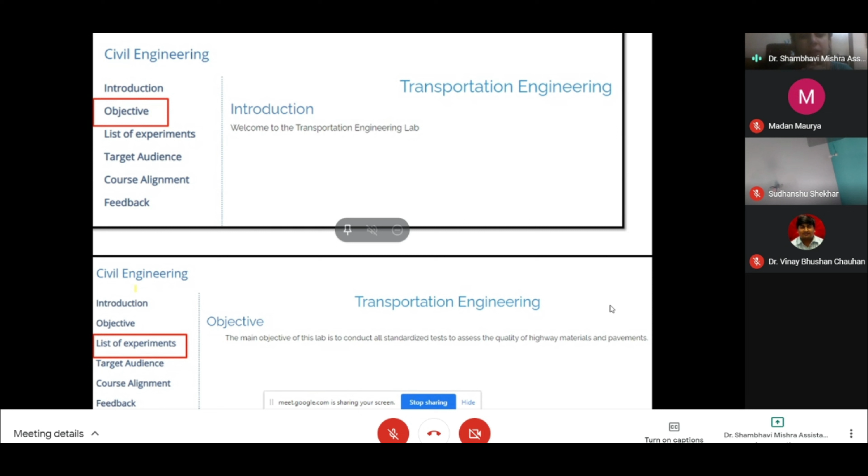After clicking on the transportation engineering icon on the virtual labs, we get this home screen in which we have an introduction to the transportation engineering lab. Basically, transportation engineering lab covers all the tests and standardized tests related to highway materials and pavement.

As we all know, there are two types of pavements used in our country, that's rigid pavements and flexible pavements. So all those materials which are used in construction of such pavements, the tests related to them, in order to judge their suitability for construction of highways, is done under transportation engineering labs.

So there are several lists of experiments. These are the list of experiments available on the virtual labs platform. There are many tests beyond this list also, but these are the major tests which will be used to assess the quality and suitability of materials to be used as highway materials.

The first three tests are on aggregates, that is the aggregates used in highway construction, like crushing value of aggregates, impact test on aggregates, Los Angeles abrasion test, and the other four tests up to seven are the tests on bitumen.

Bitumen is a byproduct of crude petroleum. We will discuss the introduction to bitumen in our coming slides. Bitumen is basically used in flexible pavement construction in our country, so it is a remarkable material in the highway construction industry.

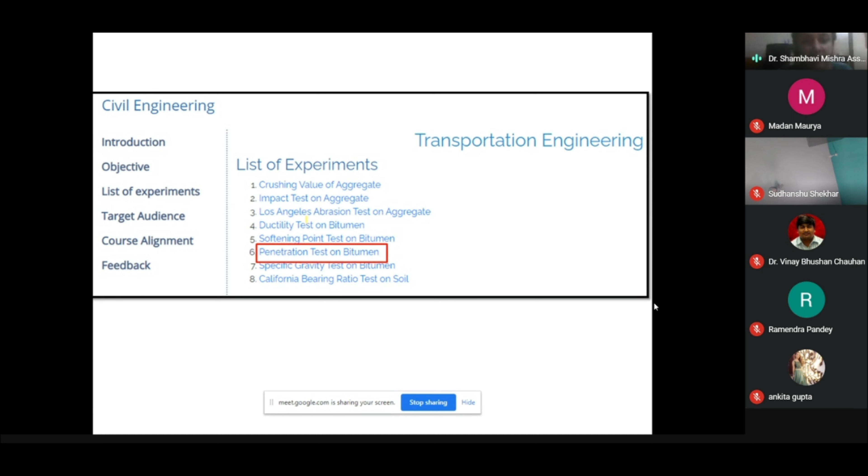These are the four tests on bitumen, that is ductility test, softening point test, penetration test, and specific gravity test of bitumen. Today I am going to discuss the penetration test on bitumen, which is used for judging the consistency of bitumen, and if time permits, I will also cover the softening point test on bitumen.

The last test in this transportation engineering lab, the California Bearing Ratio test, is performed for soil. As we all know, all types of pavements are constructed over the soil subgrade, so testing of the soil subgrade is also necessary before laying the pavement.

So this CBR test is the test for soil. Most of the tests on aggregates and soil have already been discussed with you, so today I will cover the bitumen part.

Okay, so the penetration of bitumen test. The aim of the experiment is to determine the consistency of bitumen or grade of bitumen by penetration test. Here, by consistency, we mean the hardness or softness, or the ease with which the material can be handled. The hardness or softness of bitumen to be used as a construction material is measured by this penetration.

So penetration test is basically done for assessing the consistency of bitumen. Okay, so let us first have a look at the introduction to bitumen.

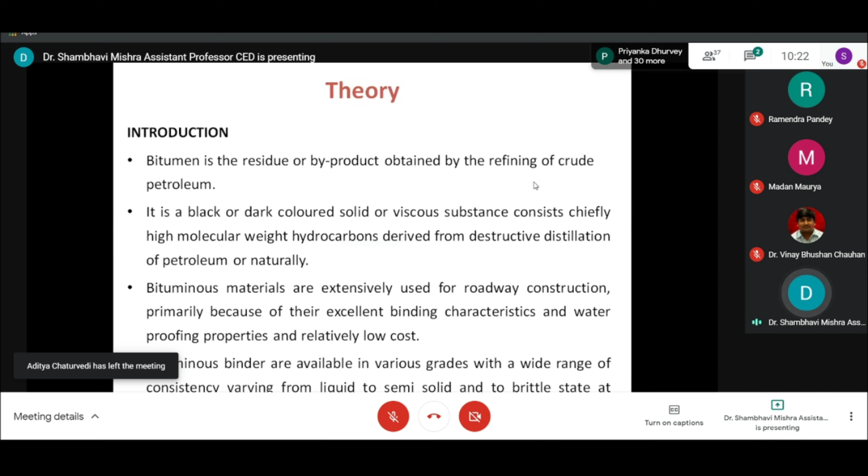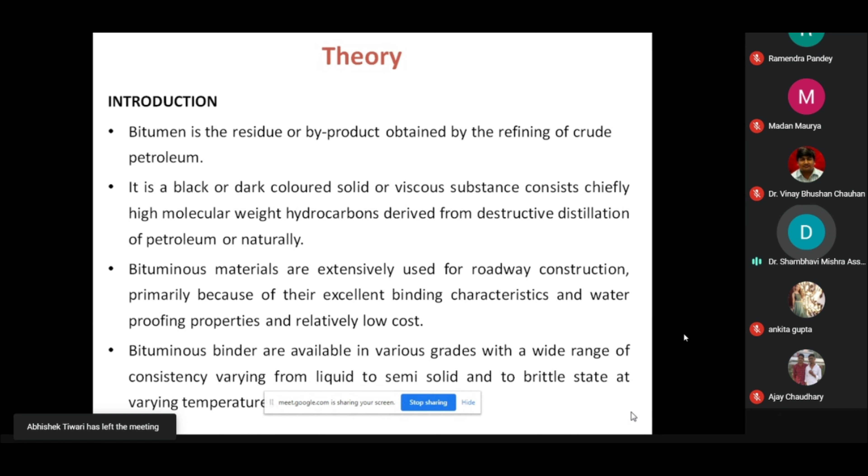There are various types of grades of bitumen produced by these petroleum industries, depending upon the type of crude oil used and the method of distillation, or destructive distillation, used in deriving the petroleum from the crude oil. So it is a black or dark colored solid, or viscous substance, which consists chiefly of high molecular weight hydrocarbons derived from destructive distillation of petroleum.

Okay, so bituminous materials are extensively used for roadway construction, that is highway construction, in our country and also abroad, primarily because of their excellent binding characteristics and waterproofing properties and relatively low cost. These bitumen materials have excellent binding characteristics.

They can keep the aggregates bound together. They also have excellent waterproofing characteristics, which stop the entry of water into the highway pavement and the layers of highway, which can reduce the quality of the highway materials.

That is why this bitumen material is extensively used in the top layers of the highway pavement, and it is comparatively lower in cost compared to its competitive materials. So bituminous binders are available in various grades with a wide variety of consistency, varying from liquid to semi-solid or to brittle state at varying temperature.

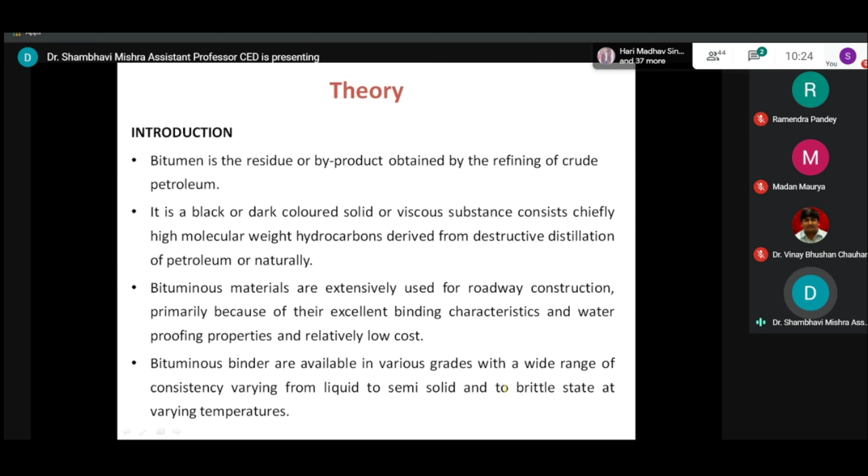So there are various grades of bitumen with a wide range of consistency. From consistency here we mean the hardness or softness. So the state of bitumen varies from liquid to solid state at different temperatures.

So in general, good bitumen should have the following properties. First one is temperature susceptibility. What is the meaning of temperature susceptibility? So the word susceptible means likely to be influenced or affected by. So temperature susceptible material means the material which is likely to be influenced or affected by temperature.

So bitumen is a material which is affected by changing temperature. Bitumen changes its shape, its form, at different temperatures. So higher temperature susceptibility means that as the temperature changes, the characteristics of bitumen vary at a high rate. And lower temperature susceptibility means that with the change of temperature, the characteristics of bitumen change slowly.

So bitumen needs to be low temperature susceptible. So the first quality of bitumen which should be there is that bituminous material must be flexible enough at low temperature to arrest pavement cracking, and stiff enough at high temperature to prevent rutting.

So we can understand it this way: as the temperature is low, the bitumen is in solid state, and as we keep increasing the temperature of the bitumen, it starts changing its state from solid to semi-solid, then a viscous liquid, then a less viscous liquid. So this is how the consistency, or state, of the bitumen keeps changing with temperature.

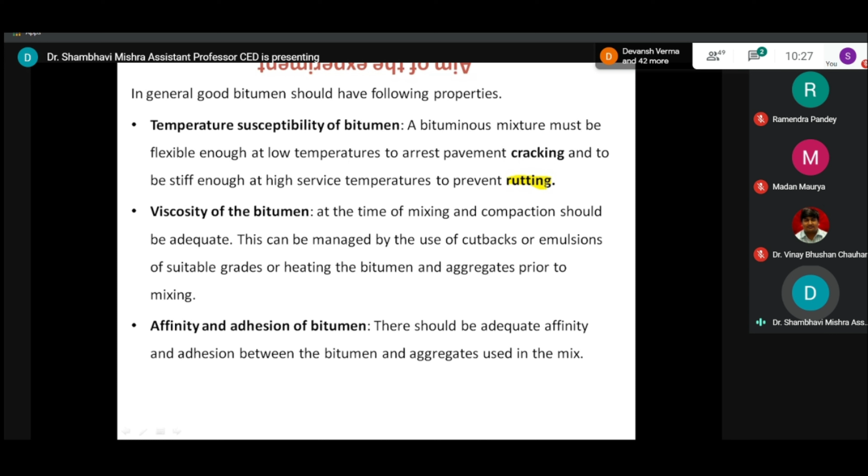Viscosity of bitumen is important at the time of mixing and compaction. At the time of mixing, it should be very less viscous so that it can properly cover the aggregates before laying onto the pavement. Then the third property is affinity and adhesion of bitumen, so there should be proper affinity and adhesion of bitumen to aggregates so that they can be used together.

Starting from the penetration test, penetration is a measure of consistency, as I have already talked about. It quantifies the hardness or softness of bitumen by measuring the depth in tenth of a millimeter to which a standard load needle will penetrate vertically in 5 seconds under a specified test temperature, load, and duration of loading.

So what are the important things in penetration test? There is a standard load needle, used under a specified temperature. The load of the needle will also be standard, and duration of loading, that is 5 seconds, will also be standard. In 5 seconds, how much the standard loaded needle will penetrate into bitumen at a particular temperature will give the penetration value.

As we know, penetration stands for something which goes into another material. So here in the penetration test for bitumen, we use a standard loaded needle with standard dimensions, released under standard load for 5 seconds. In this 5 seconds, how much it will penetrate into the bitumen material will give the penetration value of bitumen. So the penetration value is the depth in tenth of a millimeter. Suppose it penetrates 5 mm, then its penetration value will be 50.

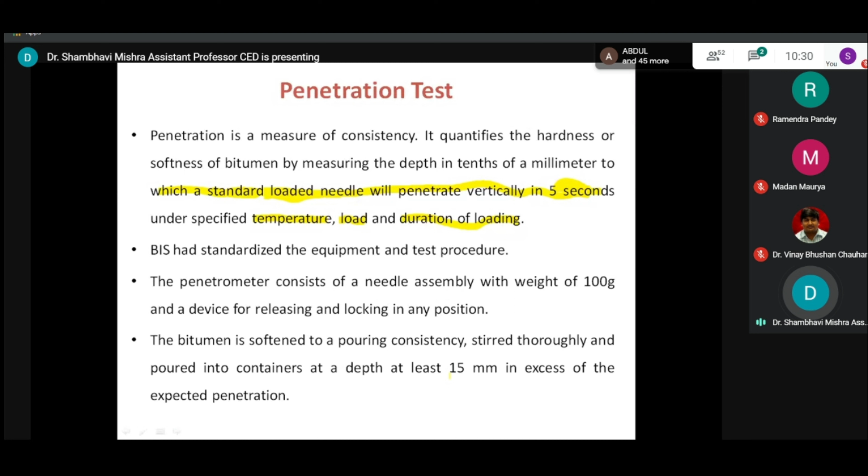This test should be conducted at a specified temperature of 25 degrees. Third most important thing after load and time of loading is the specified temperature. So this penetration test is basically carried out at 25 degree centigrade, which is again specified by Indian standards.

It may be noted here that the penetration value is largely influenced by any of the test parameters which are used, for example, pouring temperature, the size of the needle, the weight which is placed in the needle, and the test temperature. So the penetration value will change if any of these change. That is, if pouring temperature changes, the penetration value can differ.

So a grade of 40 by 50 bitumen represents the penetration value, in the range of 40 to 50. There are various grades of bitumen which are used in construction in our country. For example, a 40-50 grade of bitumen means its penetration value is in the range of 40 to 50. If there is an 80-100 grade of bitumen, it represents that the penetration value is in the range of 80 to 100. So higher the penetration value, softer is the consistency of bitumen. The higher the needle will penetrate into the bitumen, the softer is the bitumen.

So this is one of the most widely used tests for classifying bitumens. Earlier, all the grading of bitumens, which are finalized to be used in highway construction, was done only on the basis of the penetration test. But in the current scenario, various other tests have also come into existence which are used to grade the bitumen, for example, viscosity is one of those tests. But earlier, only the penetration test was used for grading the bitumen.

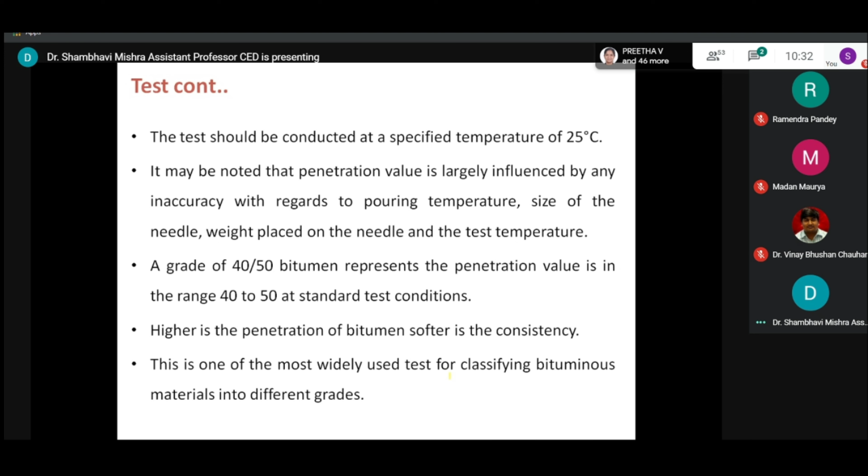So moving on to the next slide.

The use of different grades of bitumen depends on different climatic conditions and type of construction. Commonly used grades are 30, 40, 60, 70, 80, 100. Generally in warmer regions, lower penetration grade bitumen are preferred, and in colder regions, higher penetration grades like 180 to 200 are used to prevent excessive cracking.

Warmer regions prefer lower penetration grade because bitumen needs to be hard enough so that at high temperatures it will not deform under loads. In colder regions, the penetration value should be more because bitumen needs to be flexible enough so that it will not generate cracks by breaking.

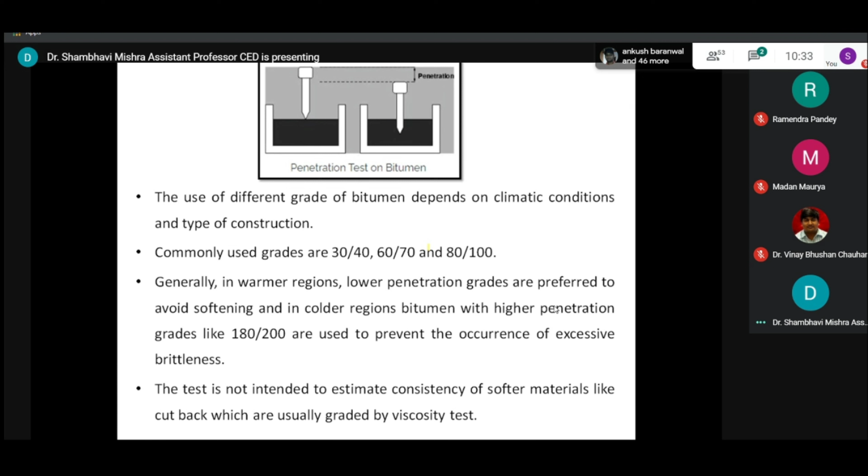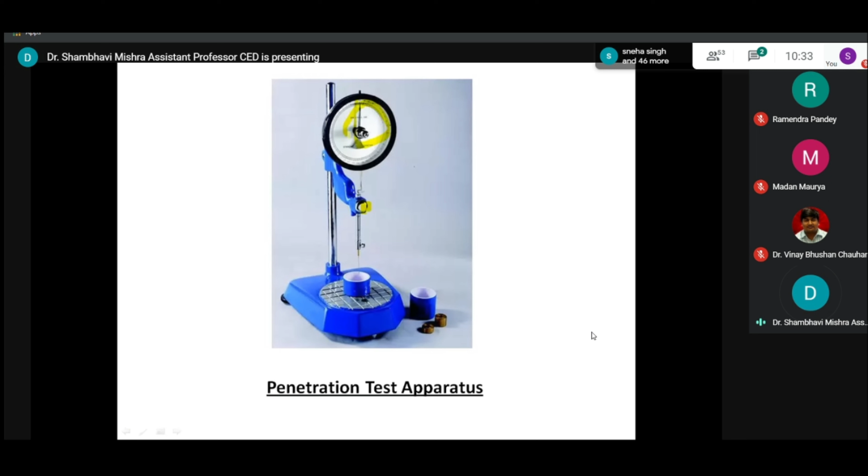When simulation is performed for this test in virtual labs, a window is opened, which will be shown in the next slide. After that, we will also have a look at how virtual labs works.

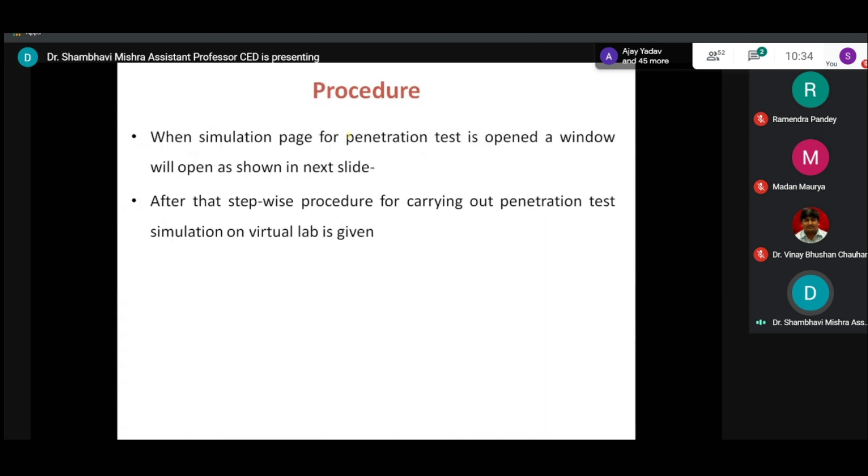Step-wise procedure for carrying out the penetration test in virtual lab is given in the incoming slides. First, this type of page is displayed when we open the penetration test, in which the objective of the test is mentioned, then apparatus required will be mentioned: the penetration setup, mold, needle, burner for heating the bitumen, and water bath for maintaining the test temperature. By clicking on the description, you can get the details of the test.

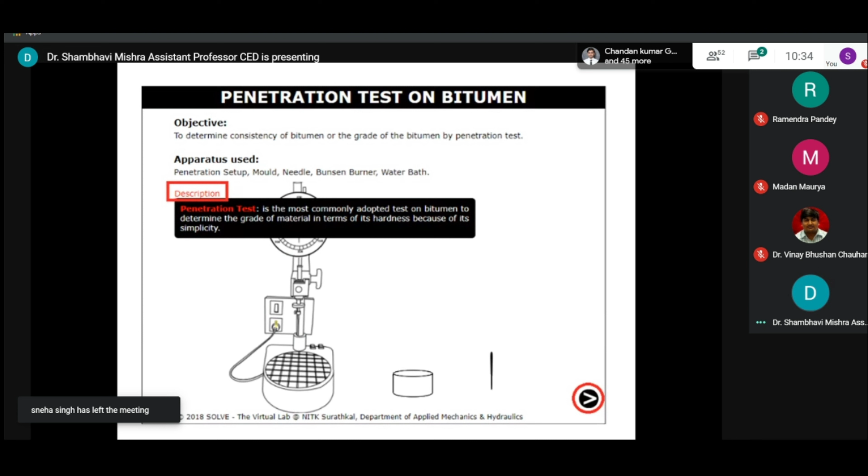This is the apparatus which will be shown in the virtual test laboratory. Moving on, we have to click on the bitumen sample to heat it to the pouring consistency using this Bunsen burner, and you have to select the correct answer.

This simulation developed in virtual labs requires you to click one by one on all the items used in the test, and then the procedure will be performed automatically. First the bitumen needs to be heated when we perform this test in the laboratory, using a Bunsen burner to the pouring consistency.

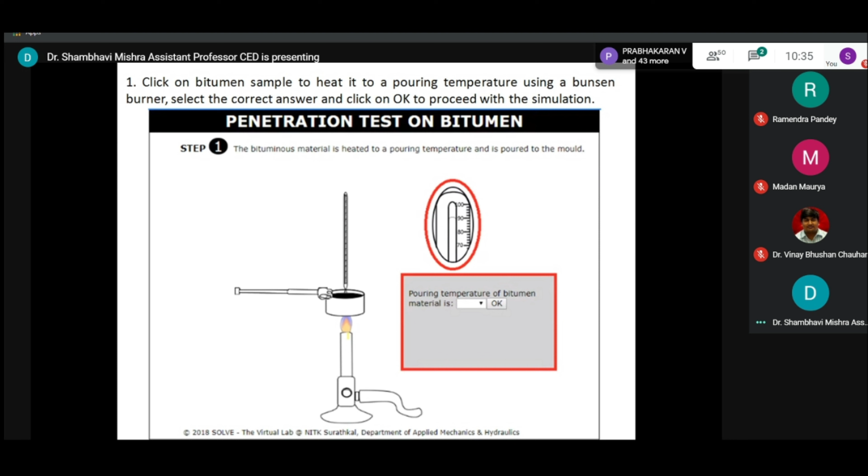The pouring temperature needed to be selected, which is 90 degrees. So first we select the pouring temperature at 90 degrees. Then it should be protected from all dust, and it should be cooled in atmosphere to a temperature of 15 to 30 degrees centigrade for 1 hour.

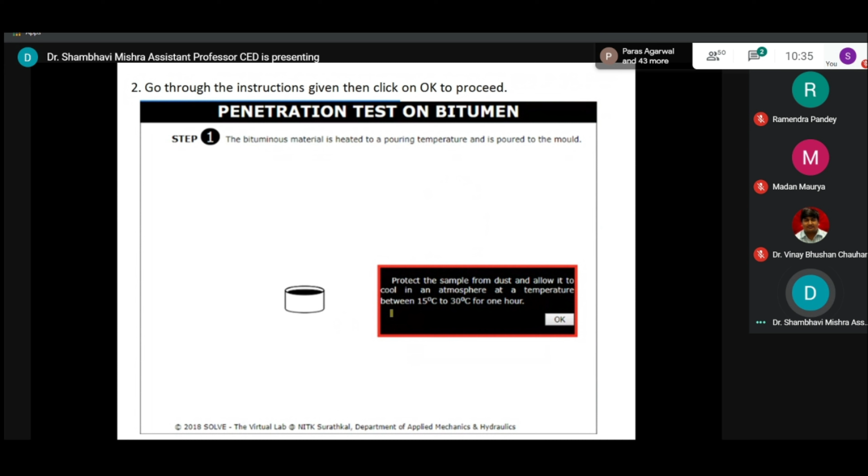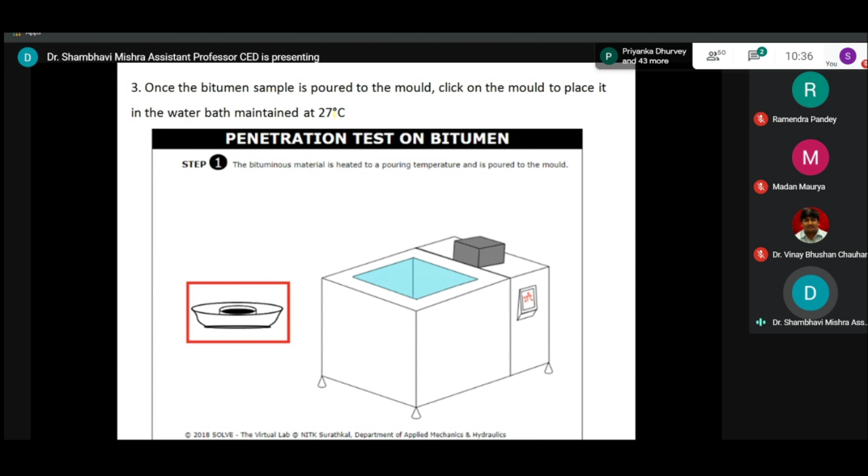After that, it is kept in the water bath to maintain the test temperature. The bituminous material is poured into the mold, and we need to click on this mold to move it to the water bath. The water bath temperature is maintained at 25 degrees plus minus 0.1 degree. This is how the water bath looks in actual.

Here we have controls for maintaining the temperature of the water bath, and water is filled in this chamber. Bitumen is kept in this chamber for 1 hour in order to maintain its temperature equivalent to the test temperature.

After that, the mold is removed from the water bath, and the needle is placed over this mold by just touching the bitumen. There is a setup in virtual lab in which you can slide this slider up and down in order to move this needle up and down. It should be adjusted so that it just touches the surface of the bitumen.

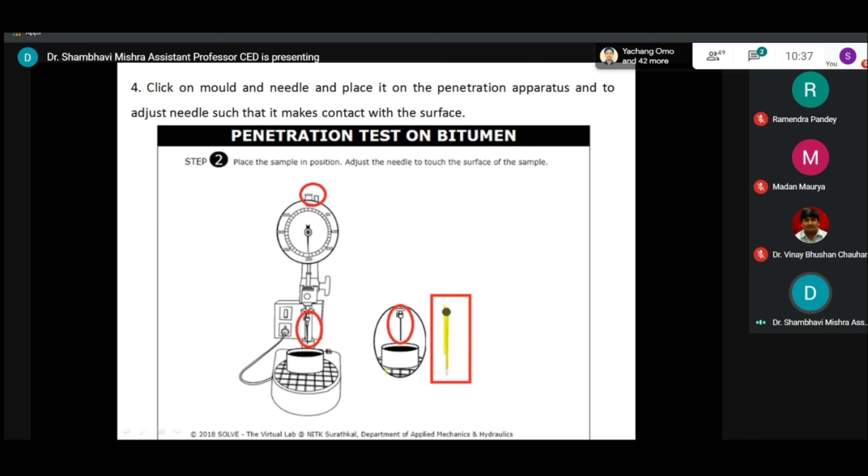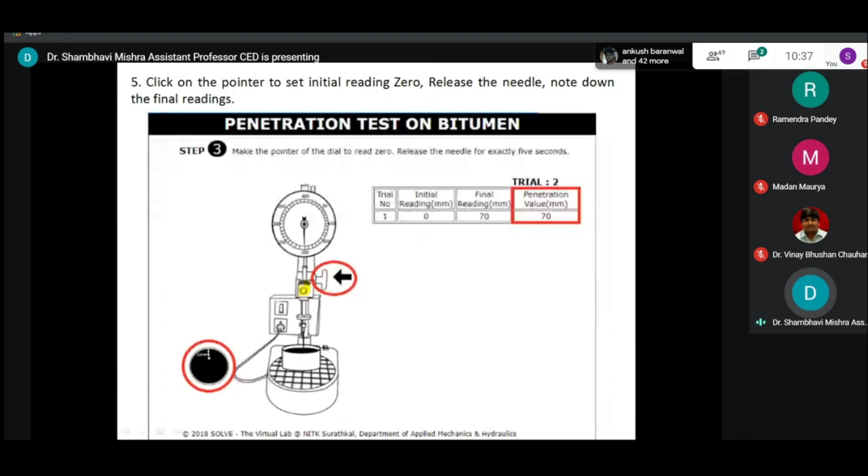After that, the initial reading is set to 0, and the needle is released from this button to make it penetrate into the bitumen under the standard load condition, that is a 100-gram load over this needle. Then we will get the penetration value in mm.

This test is again repeated 3 times, and from that we get the average penetration value, which will be reported as the penetration value of bitumen. Not wasting much time, let us move to the virtual lab platform.

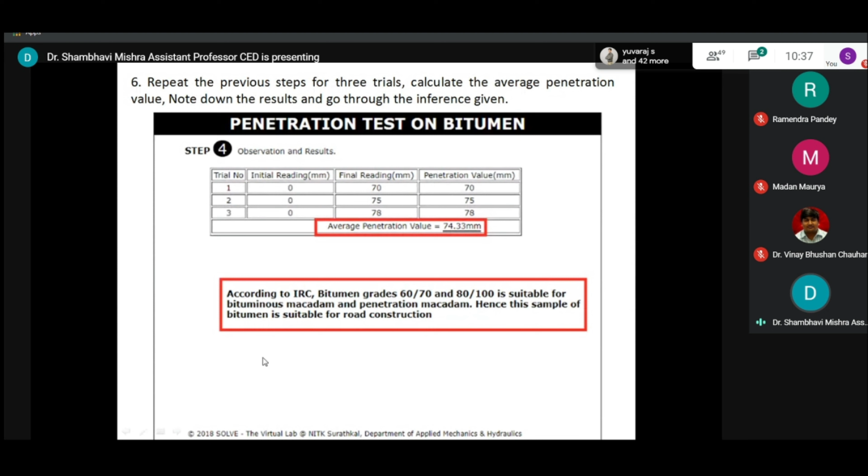to this penetration test and its physical application. So first we'll have a look at the simulation, how the penetration test is simulated on this virtual lab platform, and then we will look at the pre and post test.

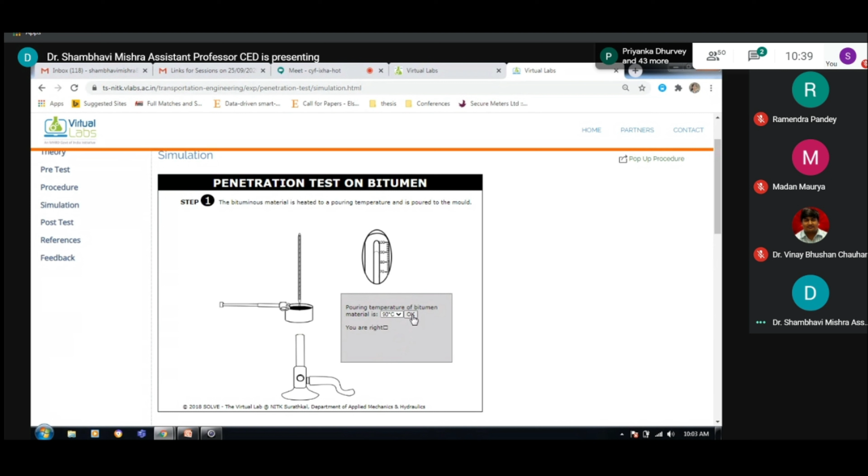The pouring temperature is 90 degrees centigrade, and after clicking OK, the bitumen will start heating, and you can switch off this burner by clicking here. Then the bitumen will be poured onto the mold which is used for testing.

So on this platform, one by one, you need to click on the icons which will automatically perform the procedure that is done offline when you perform this test in the lab. It is very helpful in understanding the whole test procedure by visualizing the test.

So first the bitumen is heated, then it is poured into the mold used for this test. Now some instruction is given that this sample needs to be protected from dust, and it needs to be allowed to cool at atmospheric room temperature for at least 1 hour before putting it into the water bath.

So then it is placed to transfer into the water bath. The temperature of the water bath is maintained at 25 degrees plus minus 0.1 degrees centigrade unless otherwise stated. Sometimes there is a need to perform the penetration test at higher or lower temperatures also.

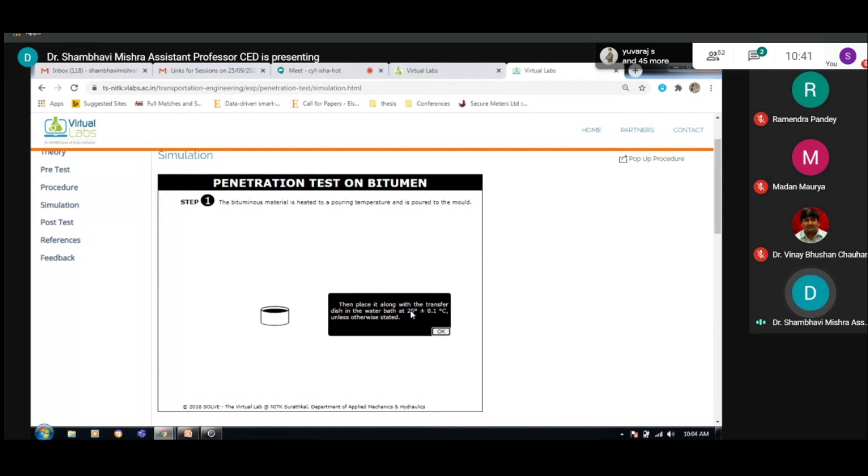This need arises if bitumen is used in construction in specific areas where temperature is higher or lower, so temperature-specific bitumen penetration tests can also be performed. But unless otherwise specified, the standard test temperature is 25 degrees centigrade. Then the bitumen mold is kept in a tray, and this tray is kept in the water bath.

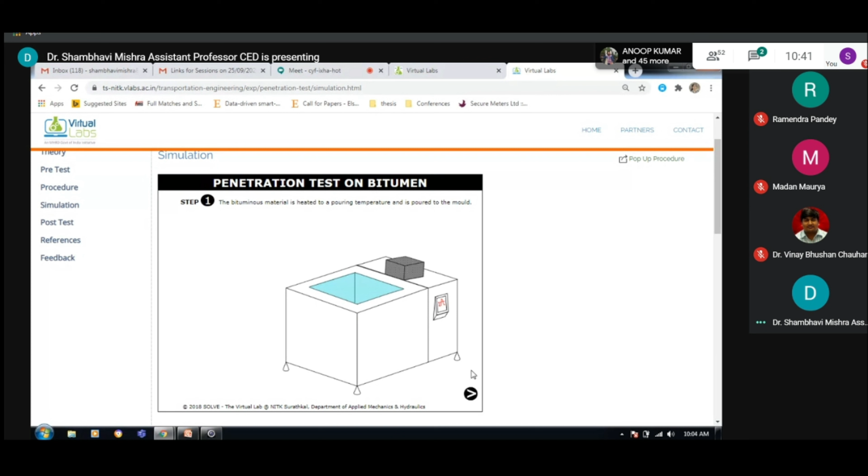Moving forward, now this sample is placed into the penetrometer apparatus after taking it out from the water bath.

So by this arrow, the simulation lab setup indicates every time what needs to be done next. Now this sample needs to be put into this penetrometer, and after that this needle is shown here with an arrow.

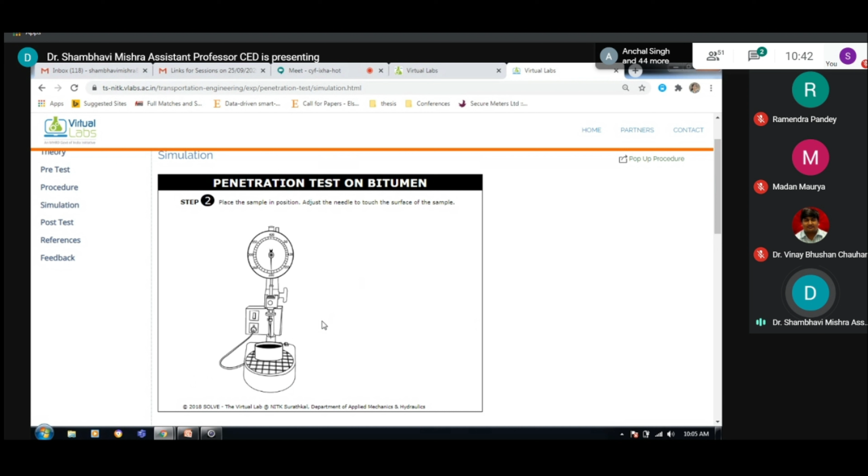So this needle needs to be put into the penetrometer, and from this handle you can adjust the position of the needle so that it just touches the surface of the bitumen.

This part of the penetrometer machine is enlarged here, and from this slider you can change the position of the needle. As you move the slider down, the needle will also move down. So the needle needs to be adjusted just above the bitumen surface.

So a message appears that the needle is in position with the sample. When the needle is in position with the sample, you can proceed forward.

And how to calculate the penetration value? One question will be asked here. The penetration value will be final reading minus initial reading.

Whatever the initial reading on this dial gauge is, in millimeters or penetration value, will be subtracted from the final reading, because the final reading is taken after the penetration has been done, and the initial reading is when the needle is just touching the surface of the bitumen.

So you can select the correct answer from the dropdown menu, that is final reading minus initial reading, and after giving the correct answer you can now set this dial gauge to 0.

So by clicking here, a button is put over the dial gauge, and by pushing that button the dial gauge is set to 0 again.

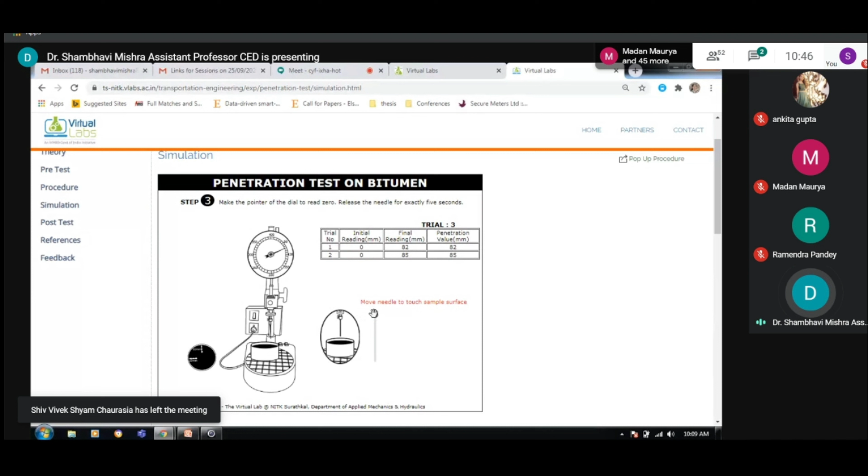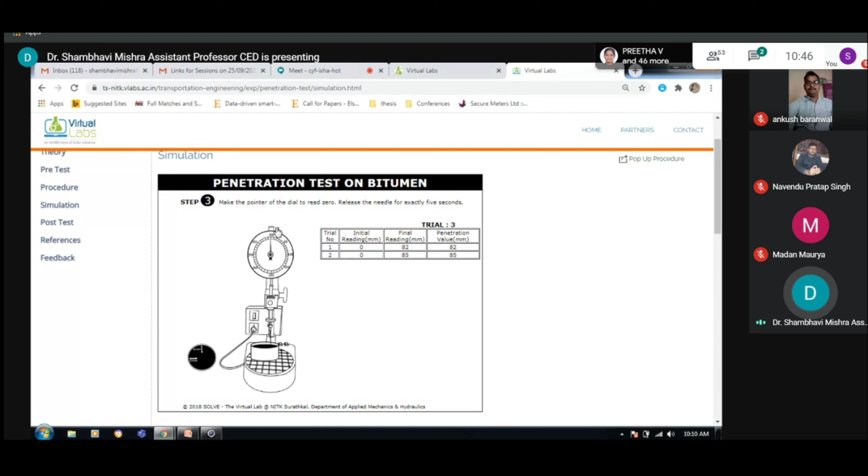We need to take 3 readings, so we'll remove the needle again and move the sample. Then set the needle just touching the surface, and set the dial gauge to 0. In actual offline lab performance, if you forgot to set the dial gauge to 0, or don't want to, you can simply note down the initial reading, whatever it is. Then the button is pressed again to release the needle for 5 seconds. The third reading comes out to be 82.

Is my screen visible and am I audible to all of you? Yes, ma'am. Okay, I'm getting some notifications, that is why.

So we get 3 consecutive readings of penetration, and you need to put the average penetration value by calculating it. That is the average of 82, 85, and 82 again, which comes out to be 83. After putting this value, you can click the check button and the value is correct.

Once again, a question will be asked by the virtual lab, whether the obtained penetration value is suitable for road construction or not. You can say it is suitable, and after that we get the notification that according to IRC, that is Indian Roads Congress, grades between 60/70 and 80/100 are suitable for bituminous macadam and penetration macadam. These are the types of bituminous construction. Hence, this sample of bitumen is suitable for road construction.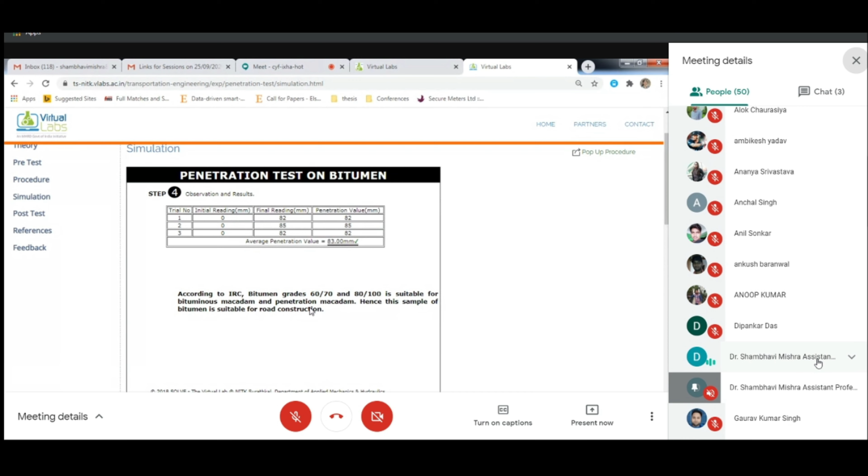So what are these types of construction? Talking about penetration macadam, first aggregates are laid on the roads and compacted in a dry state, and after that bitumen is poured over those aggregates to the required consistency, and compaction is done again. So all the voids of the aggregates get filled by the bitumen, and the aggregates are bound together by the bitumen. This is the penetration macadam type of construction. Then in bituminous macadam type of construction, the aggregates and bitumen are pre-mixed in a mixer before placing them onto the highway.

The aggregates and bitumen are pre-mixed at a certain temperature and a certain consistency, then placed on the road, and further compacted to get the final layer. According to IRC, for different types of bituminous construction, different bitumen grades are specified. Generally for bituminous macadam and penetration macadam, the bitumen grades used should be 60/70 or 80/100.

One more thing I would like to mention here: if the bituminous construction needs to be done in an extreme cold location, for example in the border roads of Uttarakhand or Himachal or Jammu and Kashmir, where there is extreme negative temperature.

In such cases, the penetration value of the bitumen should be high enough because bitumen needs to be flexible at those temperatures. For construction in extreme situations, there are different standards laid by the IRC. For example, in such extreme negative temperatures, the penetration value should be as high as 180 to 200.

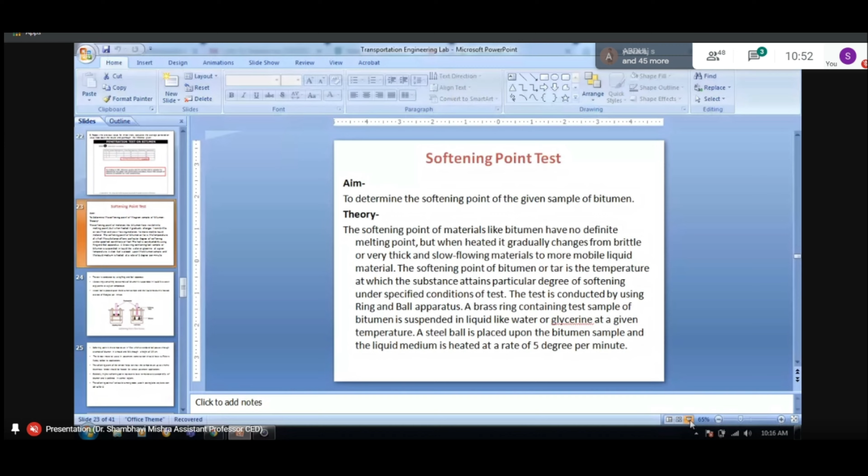Now we'll have a small look at the softening point test also, quickly. All these tests are like the penetration test we already discussed. Coming on to the softening point test, as the name suggests, it determines the softening point of the bitumen.

Softening point is that point at which bitumen attains a certain degree of viscosity. As the name says, bitumen softens to a particular value at the softening point. So the softening point is basically a temperature at which bitumen attains a certain value of softness. Bitumen has no definite melting point, but when heated gradually, it changes from brittle or solid to a slow flowing material to a more mobile liquid material.

As we have already discussed, as the temperature of the bitumen keeps increasing, its consistency differs. At low temperature it behaves completely like a solid, but at higher temperature it can behave like more liquid. So the softening point of bitumen is the temperature at which the substance attains a particular degree of softening under specified test conditions. The test is conducted using the ring and ball apparatus.

We'll see what the ring and ball apparatus is. Here, a brass ring containing the test sample of bitumen is used, suspended in a liquid like water or glycerin at a given temperature. Again, a specified temperature is used in this test also. A steel ball of certain weight and dimension is placed above the bitumen sample, and the liquid medium is heated at a rate of 5 degrees per minute.

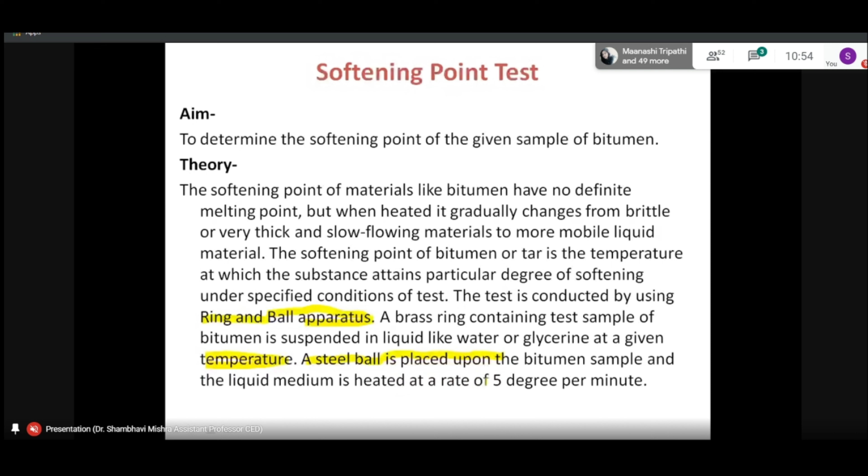Let us have a look at the apparatus. This is the ring and ball apparatus shown in this figure. Here, a brass ring is used in which bitumen is filled, and over that a steel ball is kept. This whole ring and ball apparatus is kept in a water bath whose temperature is initially maintained at 5 degrees.

After that, we start heating this water in the container, and the temperature rises at a controlled rate of 5 degrees per minute, controlled by an apparatus. As the temperature rises at 5 degrees per minute, you can see the mercury level rising in this thermometer.

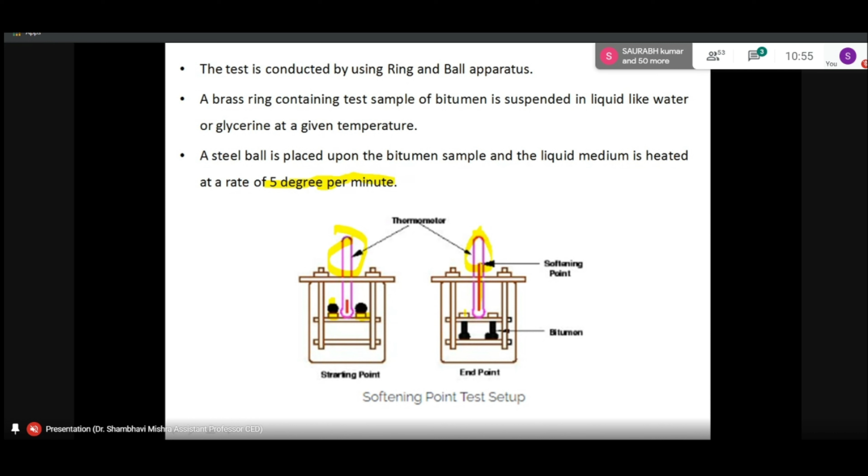This shows the thermometers. As the temperature started rising, the bitumen will change from solid to a more liquid form. The softening point is the point at which the ball from the top of this brass ring falls to the bottom of the ring and ball apparatus. The distance between the upper plate and lower plate of the ring and ball apparatus is 25 millimeters.

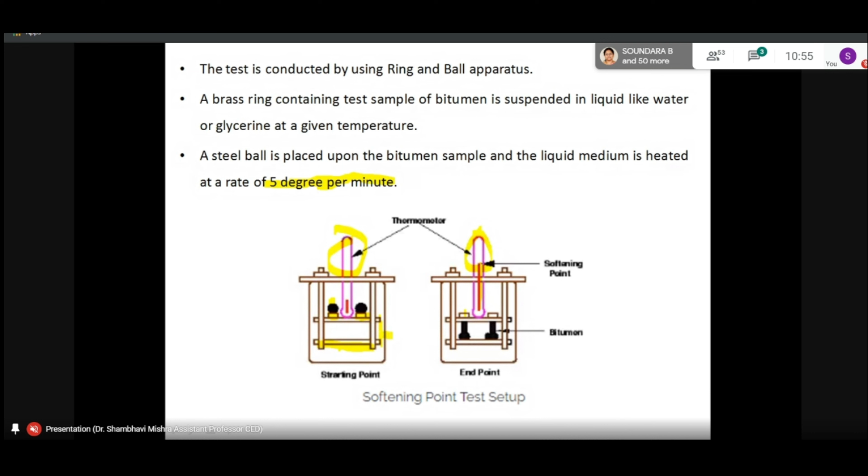So softening point is the temperature in degree centigrade at which the standard ball passes through the sample of bitumen in the mold, and falls to a height of 2.5 centimeter or 25 millimeters. The dimension of the standard ball is 9.5 millimeter, and there is a standard weight also.

The binder material used in pavement construction should have sufficient fluidity before its application. So the softening point gives an idea about the fluidity of bitumen, that at this temperature bitumen can attain sufficient fluidity so that it can be applied to the road surface.

Another importance of the softening point test is this: suppose in some area the bitumen used for construction has a softening point of 50 degrees centigrade, and this bitumen is used in construction in, for example, Rajasthan, where the highest temperature goes as high as 50 degrees centigrade. So when the road has already been constructed using that bitumen, but the softening point is 50 degrees centigrade and the highest temperature in that area also goes up to 50 degrees centigrade, then at 50 degrees centigrade the bitumen will soften and become flexible enough to deform permanently under the load.

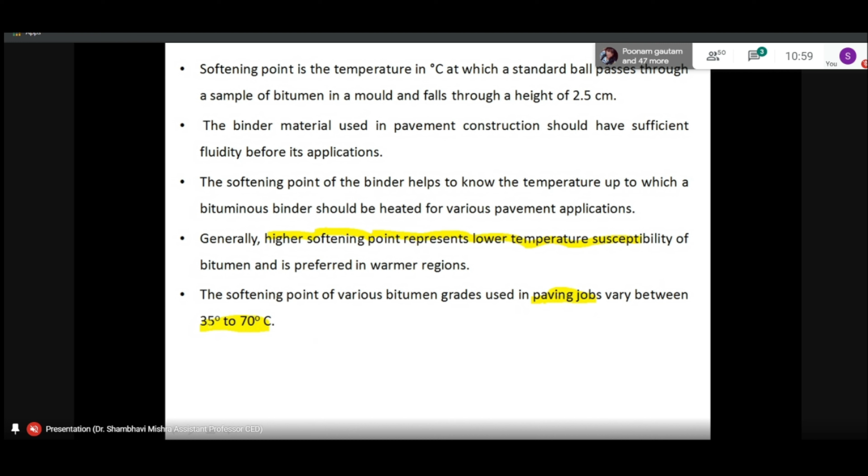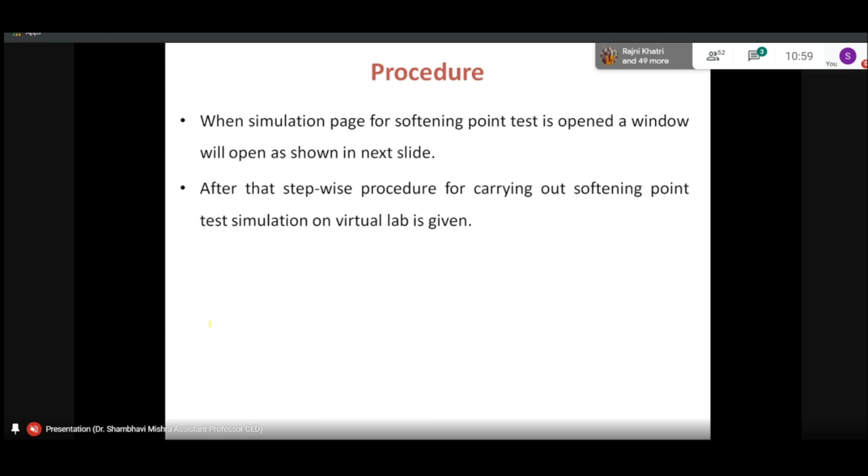This is the relevant Indian standard, IS 1205/1978, used for determination of softening point. We will again have the procedure and simulation of the softening point test in the virtual lab, but skipping this procedure, we will directly go to the virtual lab simulation.

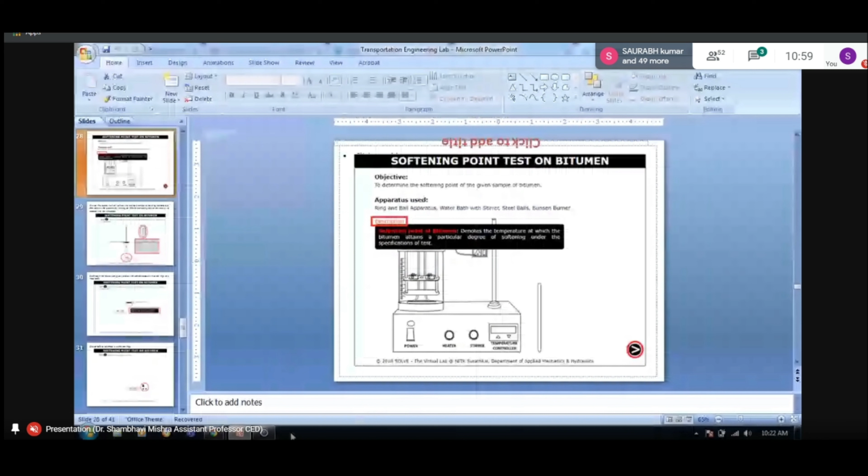Again we will go to the list of experiments, and by clicking on the softening point test, we'll check the softening point test. We have aim, theory, pre-test, and procedure, the same contents which are on the penetration test. So we'll directly go to the simulation and look at the procedure.

By clicking on the simulation, we get the apparatus for the softening point test, which contains the ring and ball apparatus. This is the ring and ball apparatus, and this is the water bath with stirrer, in which water will be filled. There are steel balls and a Bunsen burner for heating, and apart from this, there is a controller machine to control the temperature.

By taking the cursor to the description, we can get the description of the softening point of bitumen, which is the temperature at which bitumen attains a particular degree of softening under a specific test. Moving further, first the bitumen needs to be heated to the pouring consistency, that is up to 90 degrees centigrade, the same as done in the penetration test.

After this, the burner is switched off and bitumen is poured into the ring and ball apparatus rings. These rings are kept above a plate, and bitumen at pouring consistency is poured into these rings. This metal plate used below the rings is coated with glycerine and dextrin so that the bitumen will not stick onto this plate.

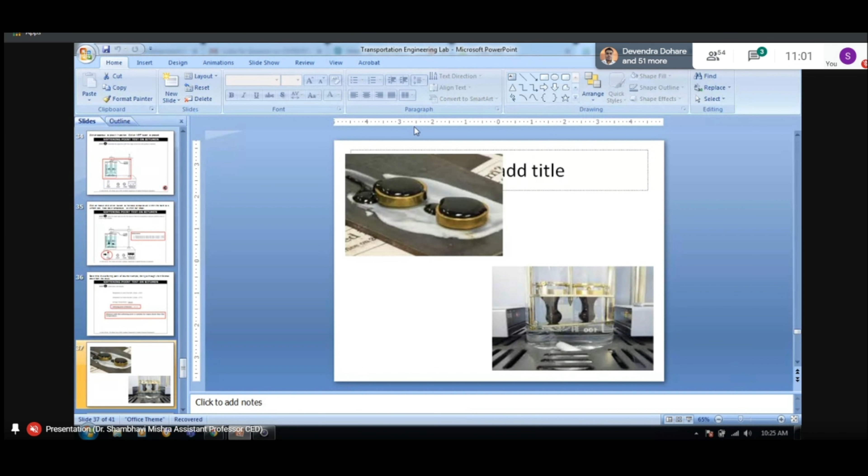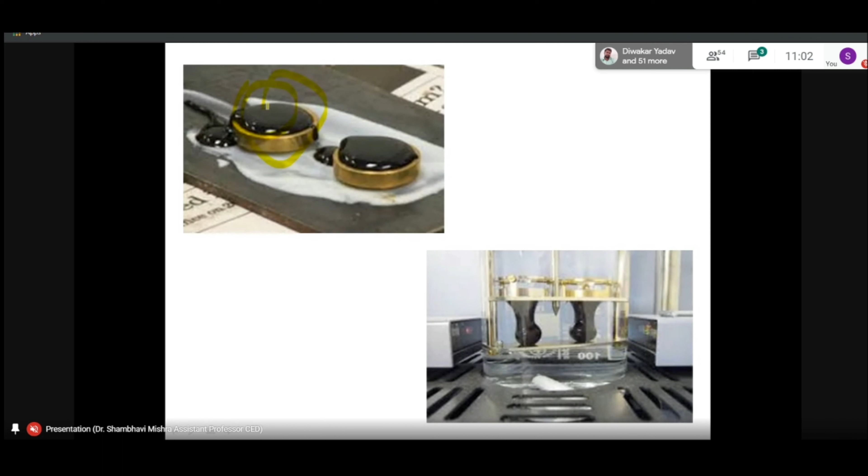This is the brass ring over which the bitumen is poured. When bitumen is poured, it looks like this, and the extra bitumen material over this brass ring can be cut off using a sharp, hot knife. First the knife is heated, and this extra bitumen over the ring can be shaved off. So after the test is performed, it looks something like this.

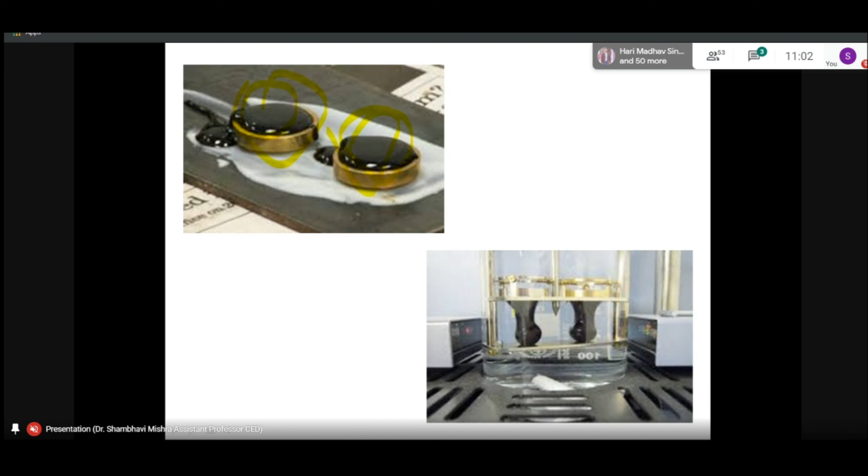So again, going to the simulation. After putting this, instruction is given by the virtual lab, clicking on OK and moving to the next step. Now the rings will be put in the bitumen, and after that the balls will be put above the brass rings which are filled with bitumen. Now this apparatus, this ring and ball, will be kept in the ring and ball apparatus.

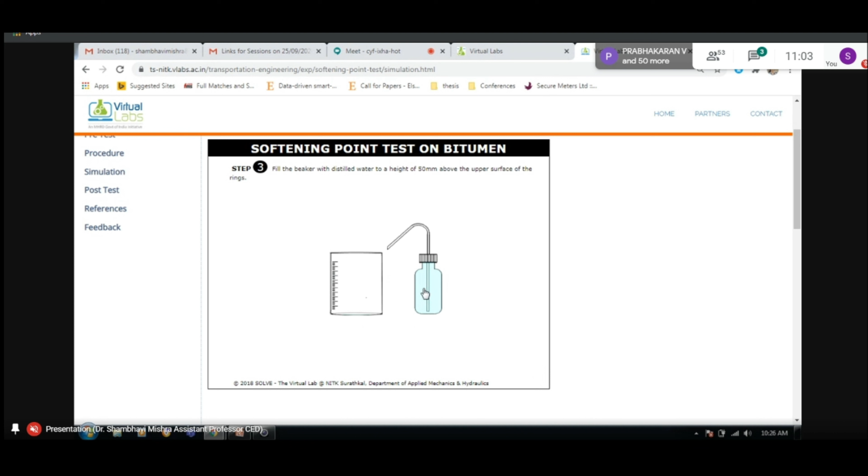The number of steel balls used is 2 because there are 2 ring and ball rings. Then moving further, water is filled into the beaker in which the ring and ball apparatus will be placed. Distilled water is used, and the height of the water in this container should be 50 mm above the surface of the rings. So from the ring's surface level, the water should at least be 50 mm above these rings.

This is to ensure a proper and adequate warming of bitumen in the ring and ball apparatus. So at the level where the ring and ball apparatus is, the water level should be at least 50 mm above that. After that, this ring and ball apparatus is kept on the heater, and by clicking this, it automatically goes into the heater.

Then you need to apply the stirrer in the water so that the water keeps stirring, ensuring uniform changing of temperature in the water, because when we heat water from the bottom, the bottom part will be heated first compared to the upper part. So this stirrer needs to be put in the water for continuous stirring to ensure uniform heating of the water.

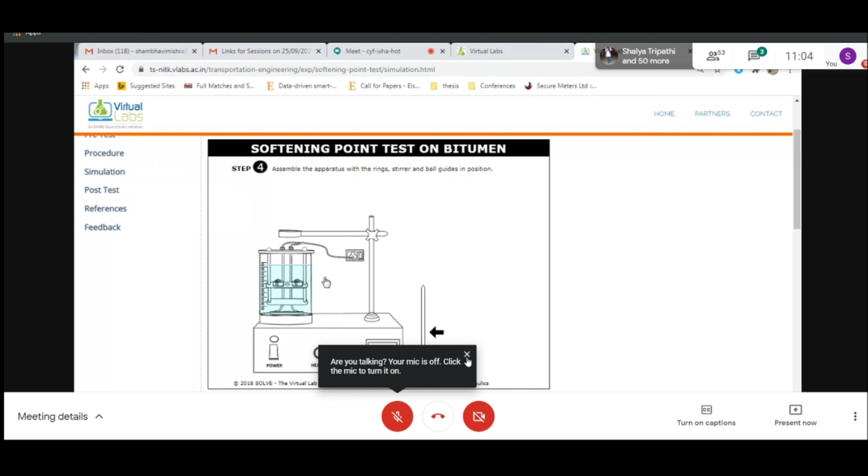Then this plug is applied for the stirrer, and the thermometer will be dipped in the water to measure the temperature. Then moving further, the initial temperature maintained is 5 degrees. The test starts at 5 degrees, and it is heated at a uniform rate of 5 degrees per minute.

So the temperature is noted when any of the balls touches the bottom plate. We need to switch on the stirrer, then switch on the burner, and adjust the rate of the temperature, and it will start the stirrer. From this temperature control, you can see the temperature keeps increasing from 5 degrees centigrade, and the balls start to fall.

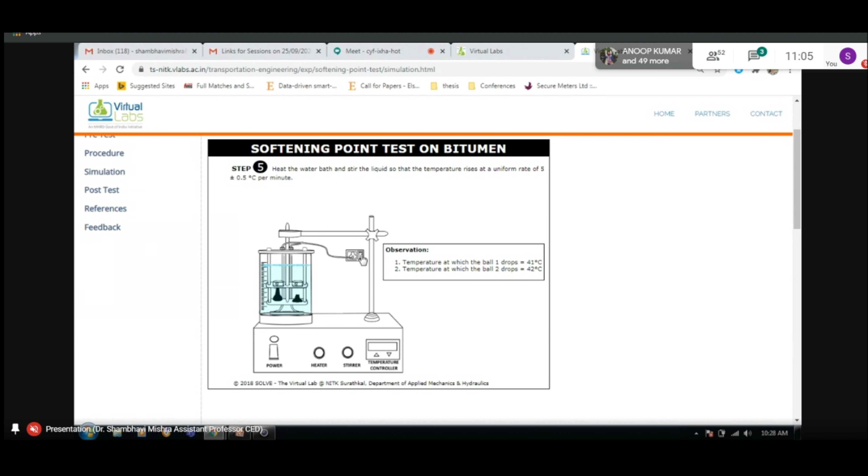The temperature at which the ball touches the bottom is noted, then the machine will be powered off. Here, the temperature at which ball 1 drops is 41 degrees centigrade, and the temperature at which ball 2 drops is 42 degrees centigrade. Then this is switched off, and we'll move to the next step.

So the average softening point will be the average of these two temperatures, that is 41 degrees centigrade and 42 degrees centigrade, which comes out to 41.5 degrees centigrade. So this will give the softening point of the bitumen.

So again this question is asked: a bitumen sample with this softening point is suitable to be used in which of these options: Shimla, Rajasthan, Karnataka. As I have already told you, the softening point should be greater than the highest temperature of any area, so that the bitumen does not soften. In Rajasthan and Karnataka, the highest temperature should be more than 41.5 degrees centigrade, so this softening point bitumen could not be used in Rajasthan and Karnataka.

A hint is also given here: choose based on the maximum temperature recorded in the region. The maximum temperature recorded in the region should be less than the softening point. So Shimla would be the answer, since there are chances that the maximum temperature there is less than 41 degrees centigrade. So this bitumen with this softening point is suitable for regions where the maximum temperature recorded is less than this temperature.

Okay, so it completes the simulation. In softening point test also we have pre-test objective questions and post-test objective questions. You can go through these objective questions.

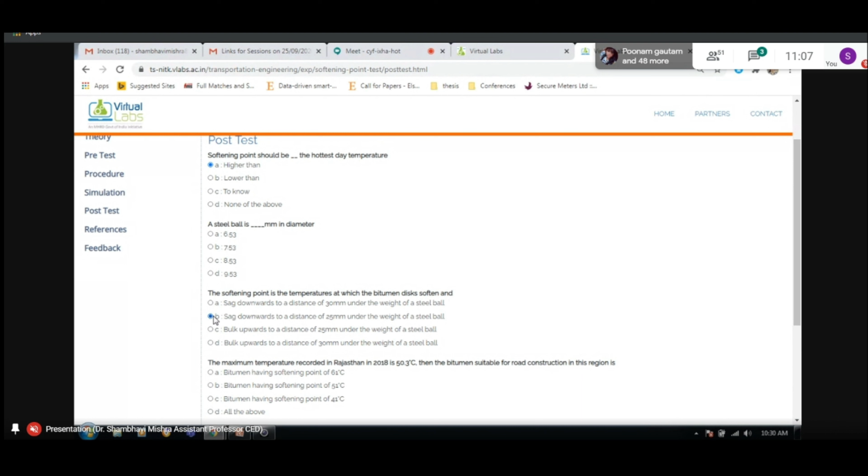For example, softening point should be higher than the hottest day temperature. The steel ball diameter asked is 9.5 mm. Softening point is the temperature at which the bitumen disc softens and sags downwards to 25 mm. So we can choose the correct option and submit the test to know the score.

Okay, so I guess that's it about the penetration and softening point test. There are other tests also to know the suitability of the bitumen. For example, viscosity test is there.

Viscosity test is generally important to know the viscosity at the time of mixing, because bitumen should be viscous enough at the time of mixing so that it properly coats the aggregates before laying. So for that, viscosity test is there.

Then we have ductility test, which tells us about the flexibility of the bitumen. There is a certain minimum value up to which the thread of the bitumen should be stretched in order to be used in highway construction.

So you can go through all other tests through the lab manuals, and you can also directly go through these tests on virtual labs, because we have all these tests. We have ductility also. We don't have viscosity test here, but we have a specific gravity test also here.

Specific gravity test is important for mix design of bitumen, because in bituminous mix design we need to know the proportion of aggregates and bitumen to be used by volume and weight group. So for that, specific gravity test is important.

So yes, I have demonstrated the softening point and penetration test. You can on your own go to the ductility and specific gravity test. So yes, I guess that's it from my side today.